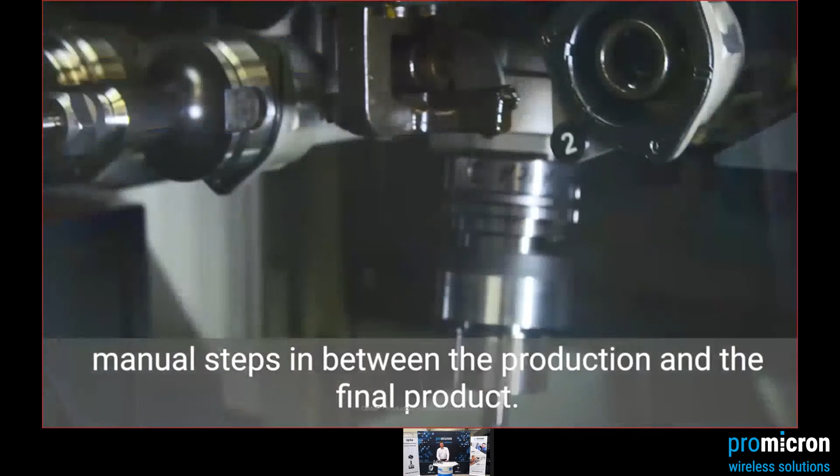I hope you got a little impression behind the scenes of pro-micron.

Before we start, I would like to use our agenda to briefly introduce you to what you can expect today. We will start with the cost drivers of the general value chain, then go to big data with pros and cons. Afterwards, we will go into the data concept of pro-micron with the Spike technology, decisions directly on the machine, the Spike map, an outlook to our AI, and after that we can do a Q&A.

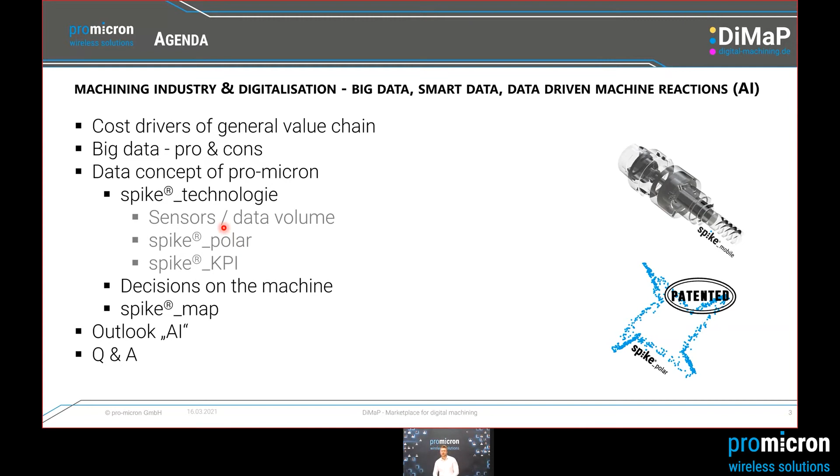So far, so good. Then let's start with the classic value chain in machining. As mentioned in the video by Mr. Lisicki, the Vice President at Grob, and as we can see on the slide, the downstream quality costs are a major cost factor in mechanical engineering—the cost after, or behind, the value adding processes, as could be seen here.

And the later an error is detected, the more expensive this error becomes. So the high quality costs are a big cost factor. However, this acknowledgement is not new, but that is the reason why our machines are getting smarter and why we add more and more sensors into our machines.

Today's machines consist of a large number of sensors, both as standard or as optionally selectable. Here it's often difficult to decide which sensors or options are the right ones. In any case, sensors are the basic building block for the path of digitalization and the big data approach.

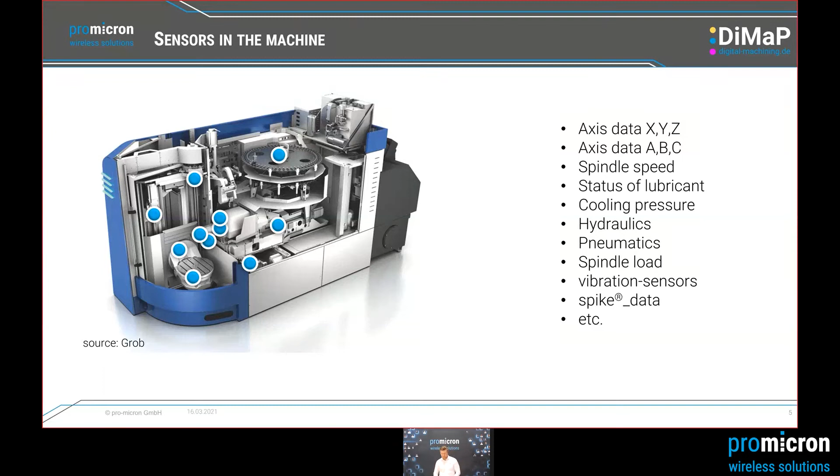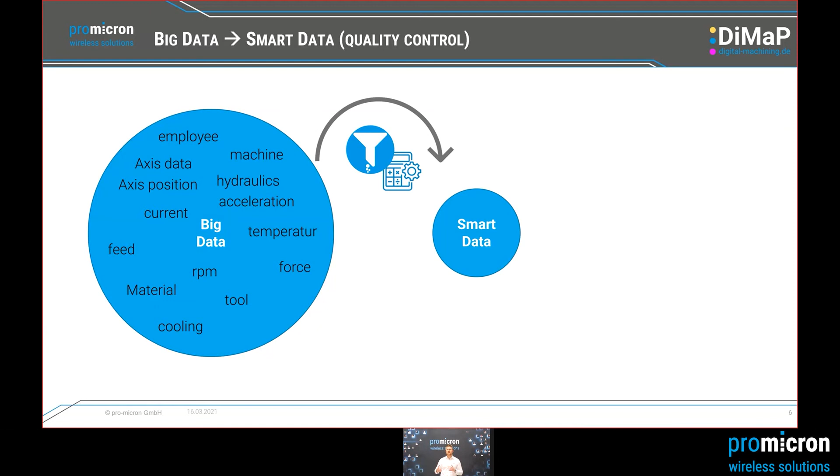But what do we do with this huge amount of data and this multitude of sensors? With intelligent algorithms, we filter the data according to our requirements. But often only a small fraction of the data is needed for one specific requirement, as an example, for the quality forecast of a part. So the situation is: a big data volume is needed, mainly for downstream analysis of data, and data specialists are needed.

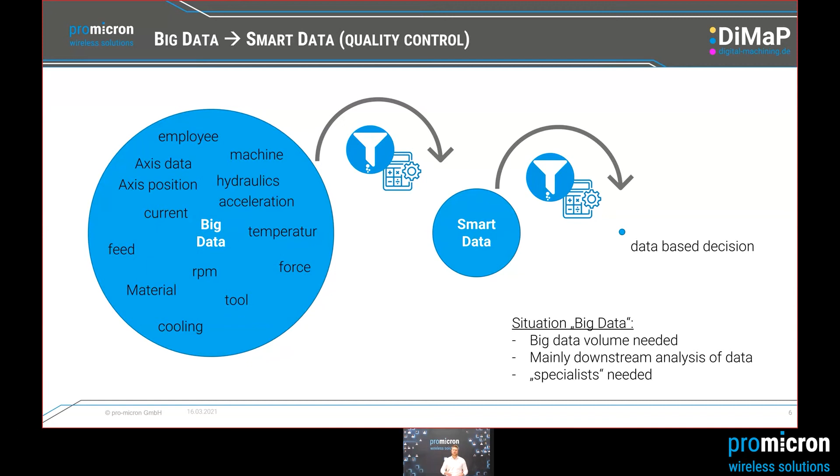But let's go back one more step and have a look at the big data concept in a fundamental way. On the left-hand side we can see the advantages of big data, and the advantages of big data definitely predominate.

Chances for better decisions, increase of productivity, to reduce cost, improve the service efforts, more flexibility, structured data storage.

But for the disadvantages, mostly and especially in Europe, the point of security brings a huge discussion with it. It is not the security itself, mainly it's an internal political decision in a company. Everybody and everyone wants to produce big data, but nobody is ready to share the data.

So the other disadvantages would be big data volume. We need experts, so data analyze experts, or we need a quality of data because it could fluctuate. But the fact is, we have to change our mindset in the machining industry.

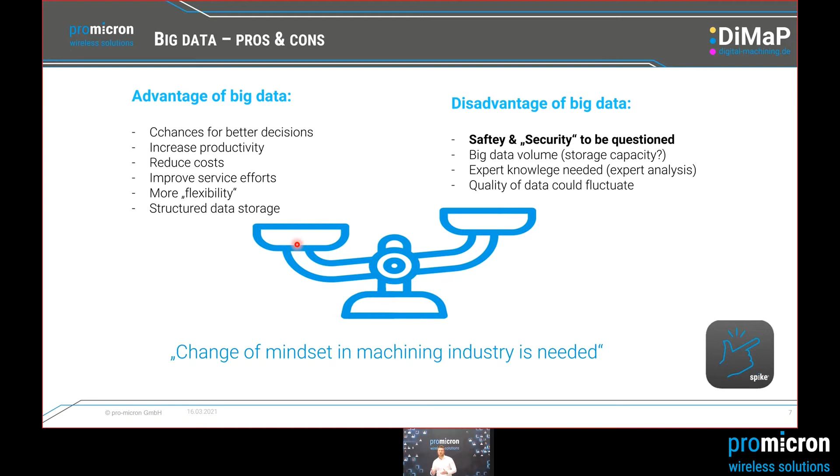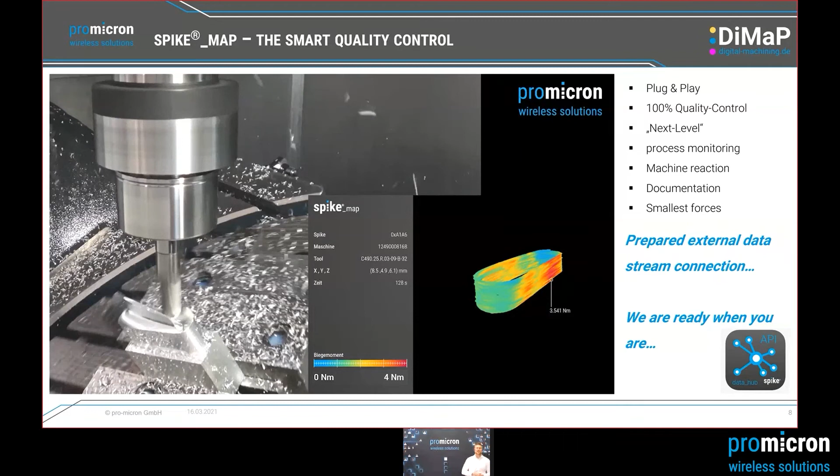So now I want to show you our idea of the smart data approach. It starts at the end, but I just want to give you a quick overview, and I just wanted to let the video speak for itself. Later on, we will go much more in detail into this solution. So it was just a quick jump into our product.

So in summary, what is the pro-micron spike map? It's a plug and play solution, so very easy to handle. Plug and play at the machine, very easy. A 100% quality control, next level process monitoring. We can do machine reaction. We have documentation, down to the smallest forces.

The external data stream is prepared to connect, and we are ready when you say yes, we get the security. But what makes our approach so different?

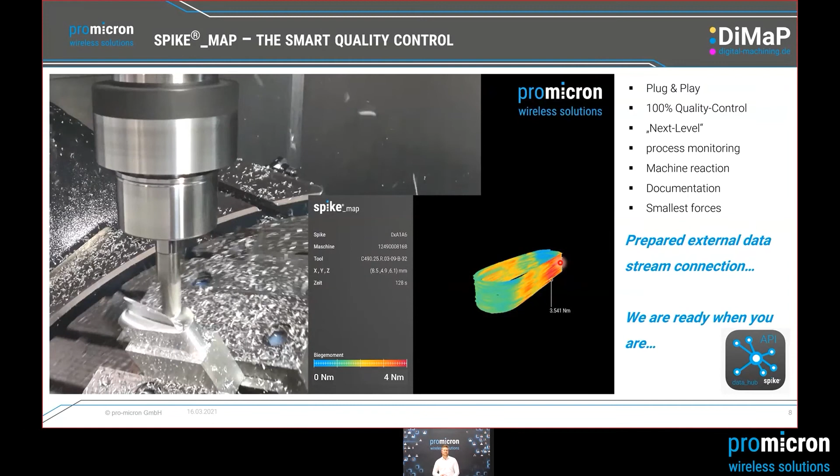We as pro-micron, or our pro-micron philosophy, means the further from the machine, the less quantity of data, but the more quality of data. So data pre-processing. We mainly focus on efficiency and response. With response, I mean response with the machine and machine response, and to create some actions. With our data hub, the big data approach is still possible, but just where it's needed.

So we got our spike sensors on one hand side, spike mobile and spike inspindle. We got the radio connection to send the raw data of bending moment, torsion, axial force. And here we get very nice and clever.

So that's the brain of our tool control center, filters and algorithm to calculate numbers which the machine could read. So we get here like a traffic light signal. We get red, yellow, and green signals, which are very easy to handle, and we get values.

So the pro-micron spike philosophy: raw data directly at the action point, real-time algorithm decisions and reactions directly on the machine, and no operational specialist is required.

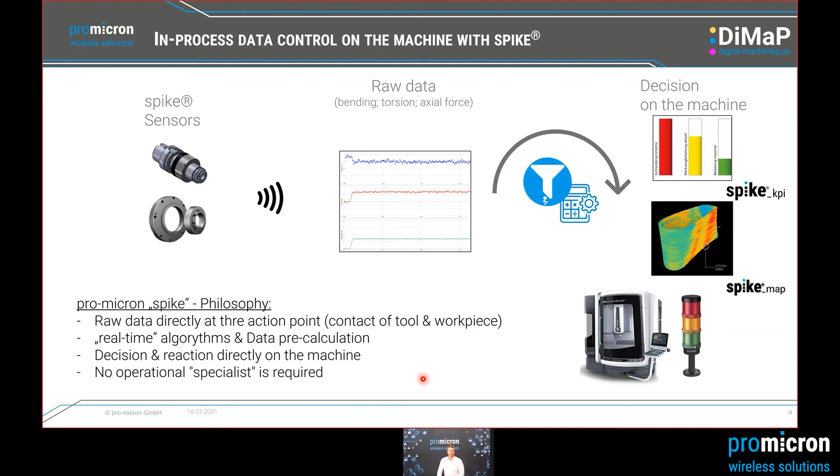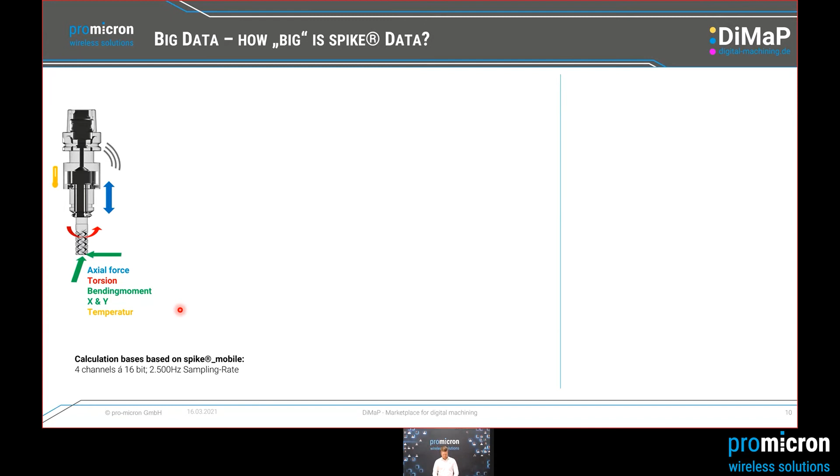But let's see how big spike data are. When we look at our spike mobile and look at axial force, torsion, and bending moment for the 4 channels with 2,500 hertz sampling rate, we get per minute 1.6 megabytes of data. Per day, 2.4 gigabytes. Per week, 16.8. And per year, we got about 900 gigabytes of data.

And now, imagine the impact for sensor systems with sample rates above 20,000 hertz. Or even better, imagine you got more than one machine in your machine hub.

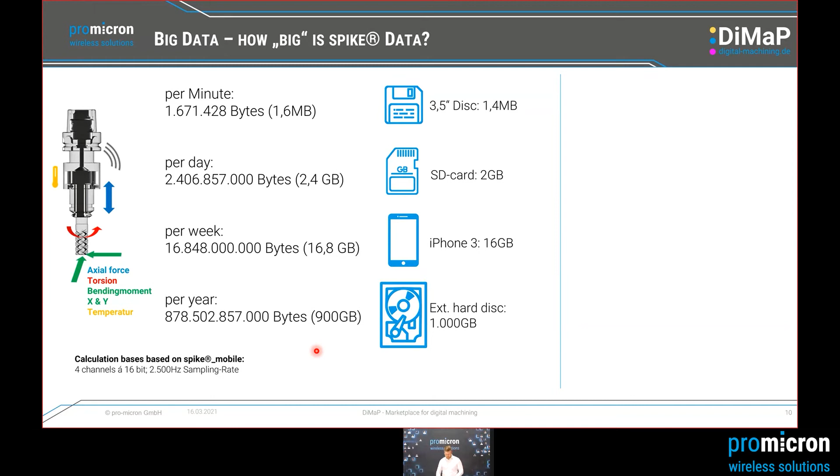So back to our spike system. By using an example from aerospace, one of the big blisks needs about 70 hours operation time. And in those 70 hours, we generate about 7 GB of data. This is about 10 CD-ROMs of 700 megabytes each.

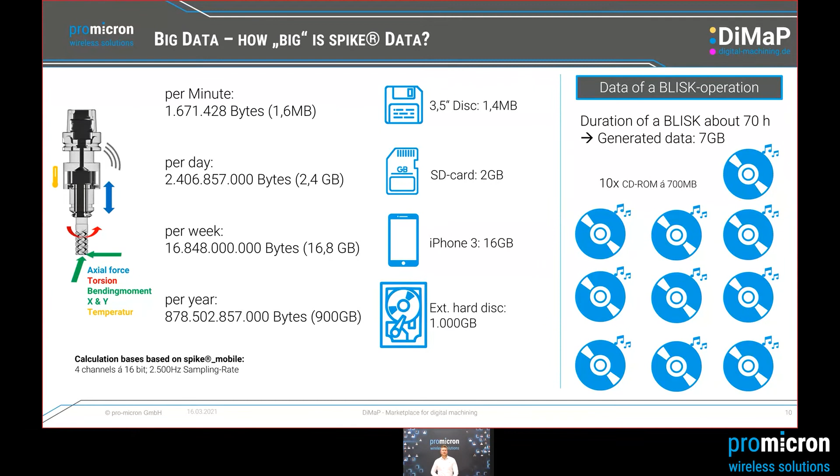Let's compare a few of the most common sensors in another way. Here we got our spike sensor technology at direct measurements. We got a spike mobile as retrofit on all the machines as possible. We get different sensitivity classes, so we can use it from huge tools to the smallest tools or finishing processes. We got our spike inspindle solution, which could be ordered at Grob or DMG, which is a very small sensor in the spindle nose, where you can see most of the data.

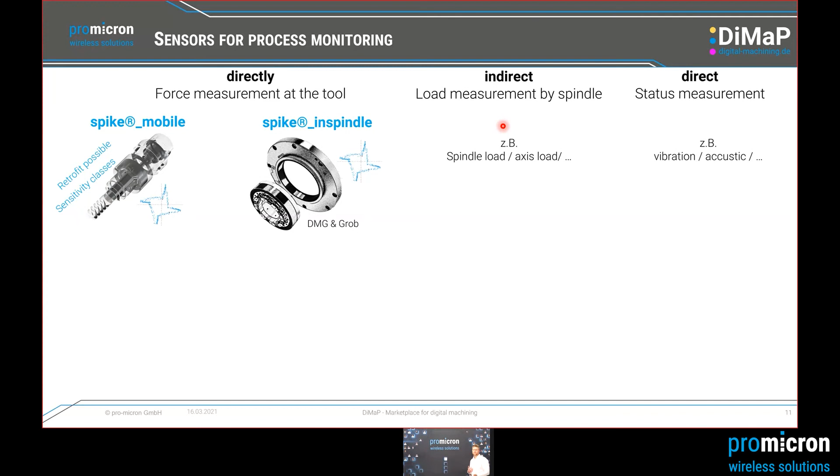As next, we have an indirect load measurement system by the spindle, for example spindle load, or we have a direct status measurement of vibration. The data which we can see are axial force, torsion, bending moment, temperature.

But yeah, we see different things. We see maybe vibrations, we see bending moment. But the use case in serial production, in monitoring, in quality, you don't want to know a bending moment. You want to know a value of chattering. You want to know a value of quality.

So what we want to show with this slide is the general networking of all data through pro-micron Tool Control. With the data hub, you can combine all these sensors. It doesn't matter which sensor you use or which sensor you need.

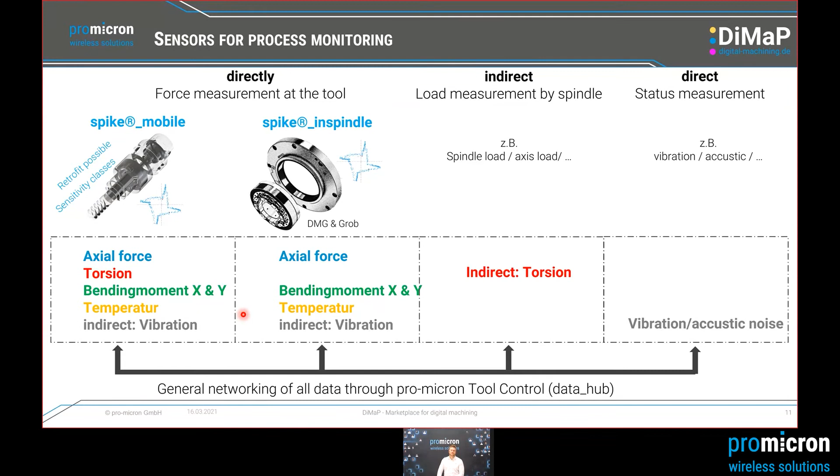The best and most sensible solution for you can just be determined in a joint conversation. Don't hesitate to contact us to discuss your individual use case with our application engineers. We'll be happy to advise you.

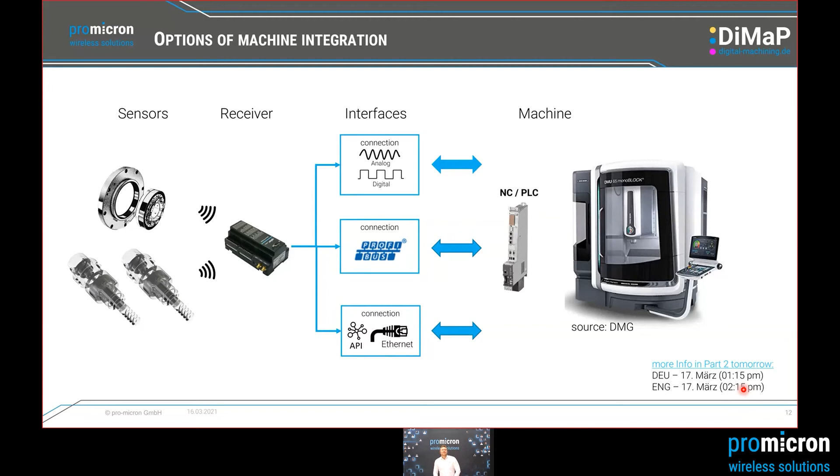So, enough of raw data and theoretical data concepts. What benefits can we achieve for the use case of inline quality control?

With our patented spike polar, we can see more than just a vibration or an increase of force. Here, for example, if one of the cutting flutes gets a small breakout or something like this, we can see each cutting flute, and so we can detect something like this.

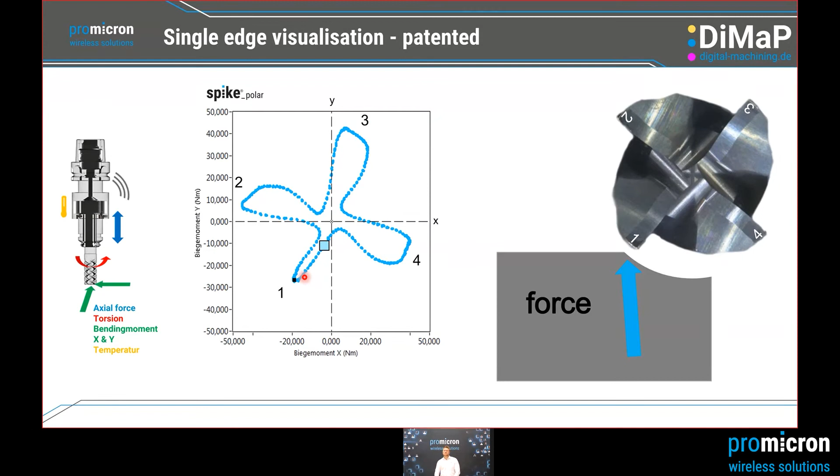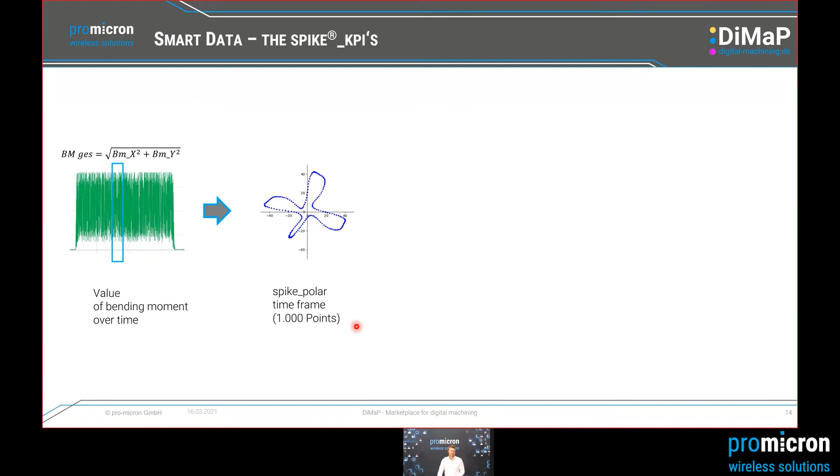But how does that work in machine connection? Our concept of smart data strategy: when we look at our raw data, we get a spike polar time frame of, for example, 1,000 points. So out of the raw data, we get 1,000 points. Now we have these 1,000 points, and we have intelligent filter options to reduce the spike polar as needed for this solution. So here, for example, we reduce the 1,000 points to 50 points.

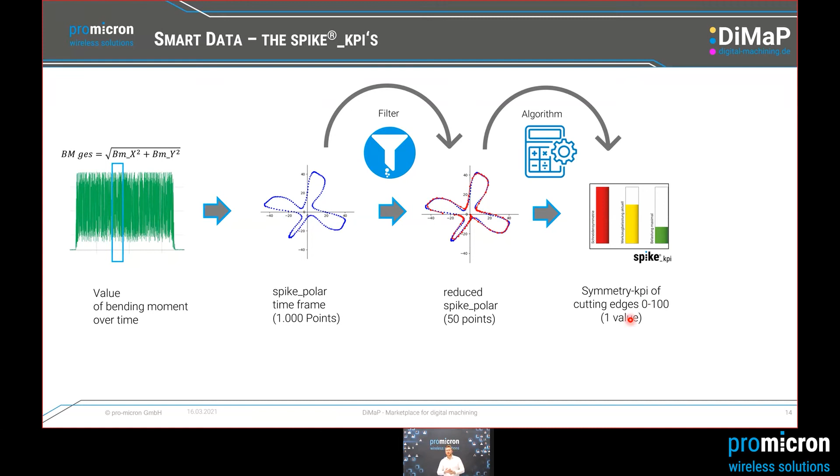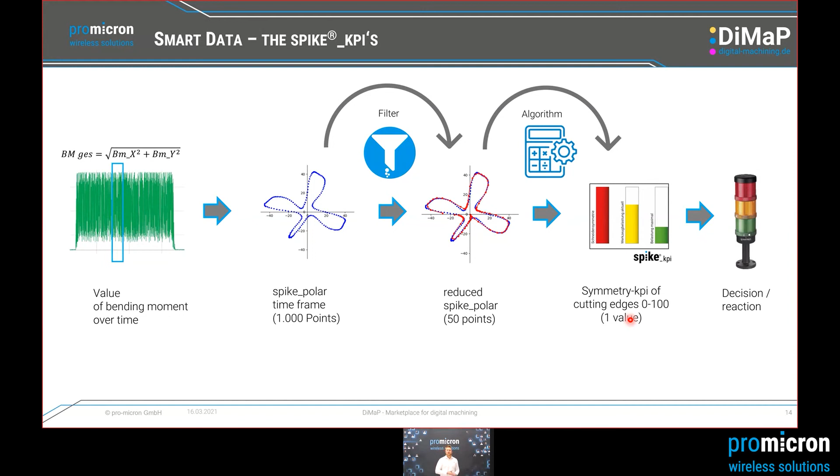After that, we have another intelligent algorithm which calculates a value between 0 and 100. So we get one value for one benefit. Do you think a machine can read this value much better than the raw data? Of course it can. And that's the reason, and that's the way how we do decisions and reactions directly at the machine. But let me show you this strategy with two concrete examples.

Example number one: the KPI for cutting edge breakage and concentricity, so run-out errors. We can see a new tool, a slightly worn one, or a highly worn one, cutting flute. So we prepared this cutting flute, and here you can see this one flute. At the beginning, everything is very symmetrical.

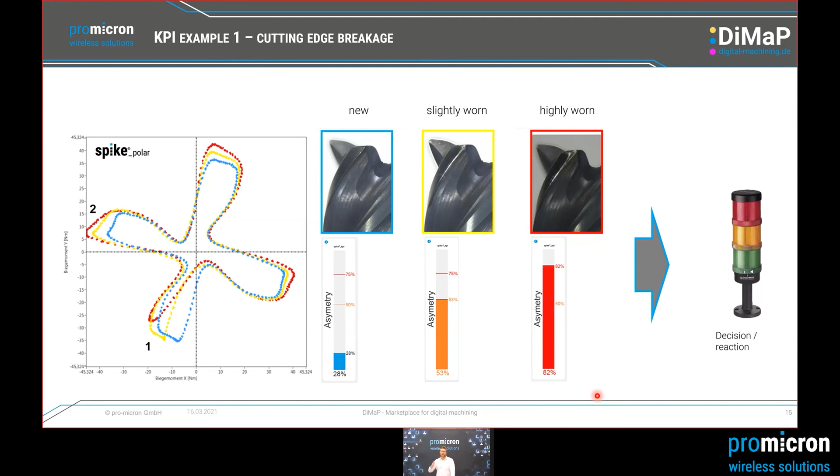So yeah, we get a very low level at the blue one. But after this slightly worn cutting flute, you can see there is a change in our spike polar, and that's what our value calculates out. And if you get a highly worn tool, you can see that the asymmetry is very, very bad. And so here you can make a decision: I have to change the tool, so you can do the reaction, change sister tool.

Another example is when we look at our raw data of bending moment. For the people who know our spike system, with the raw data you can see, for example, the amplitude - you can think about vibrations. So when there's no chattering, the amplitude is low, but when you get strong chattering, the amplitude is higher than with no chattering. But what do most machines do, or what does the spindle load monitoring do? They filter the data.

So now I want to show you our chatter KPI, and how it looks in different situations. When we have no chattering, here we can see the chatter KPI is 0 to 100 - here we get a level of 0. When we have strong chattering, here we have a level of 100.

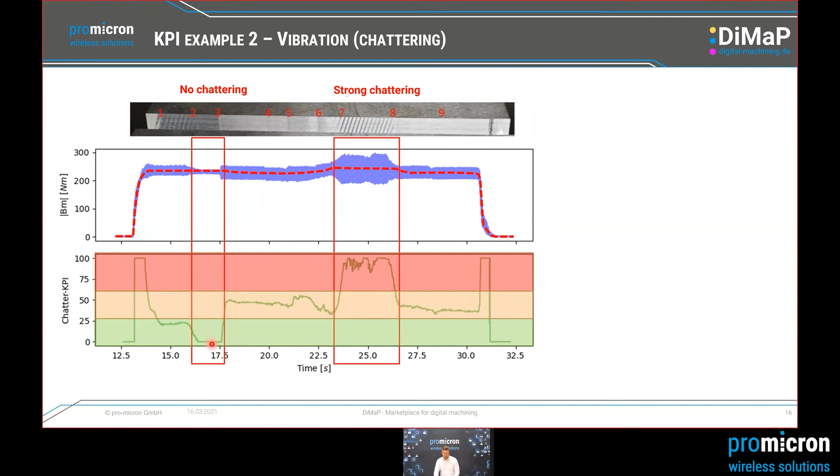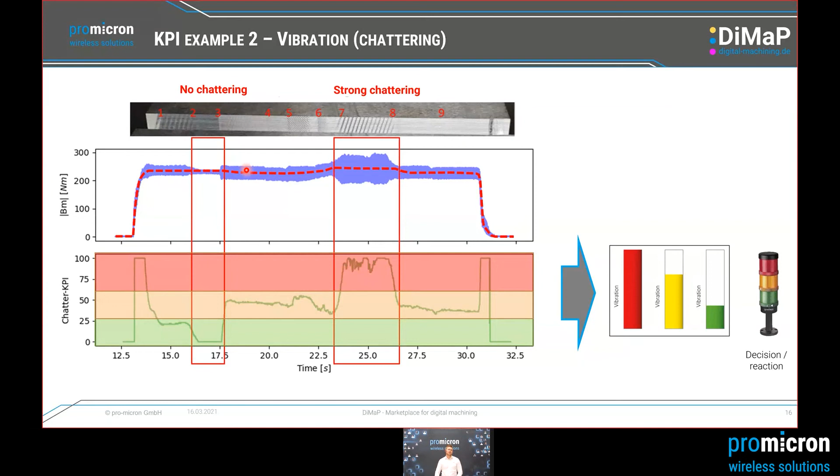And that's what I told you before - we can make a decision or a reaction. It doesn't matter how high the bending moment is in this situation. If you want to react to chattering, we can give you the chatter KPI and tell you, yes, it's chattering or not.

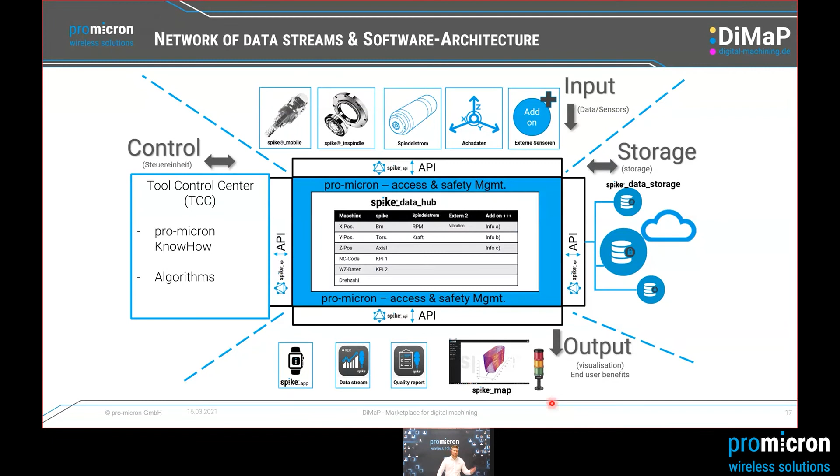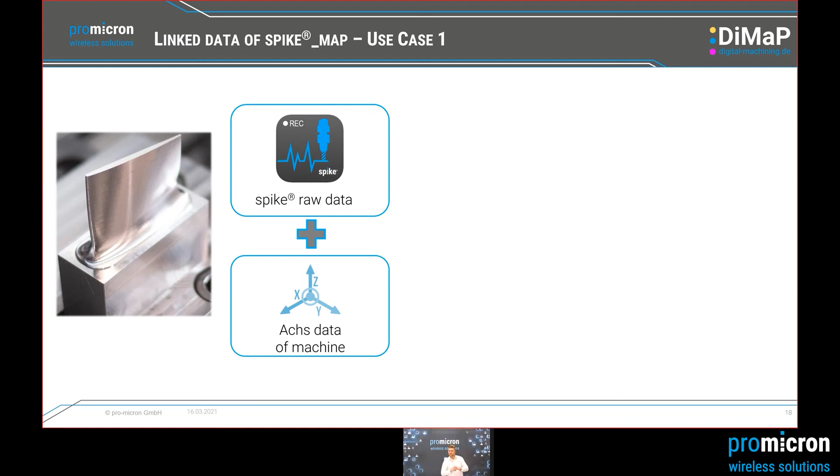So linked to the data of Spike, I want to present you use case number 1 for today. We are now slowly coming to the climax of our today's talk and our Spike map. The idea is to synchronize the measurement data with the axis position, to create a kind of digital twin. Our solution is called Spike Map.

In use case number 1, for the quality requirements of aerospace machines, we have the requirement of surface quality. Surface is very, very important. So we want to detect chatter marks or broken cutting edges.

Aerospace quality reports - each part should be reported. Each part, you should know how big or how good the quality is of your part. We need easy handling and visualization, and definitely you want reactions into the machine. And that's all together with a plug-and-play solution.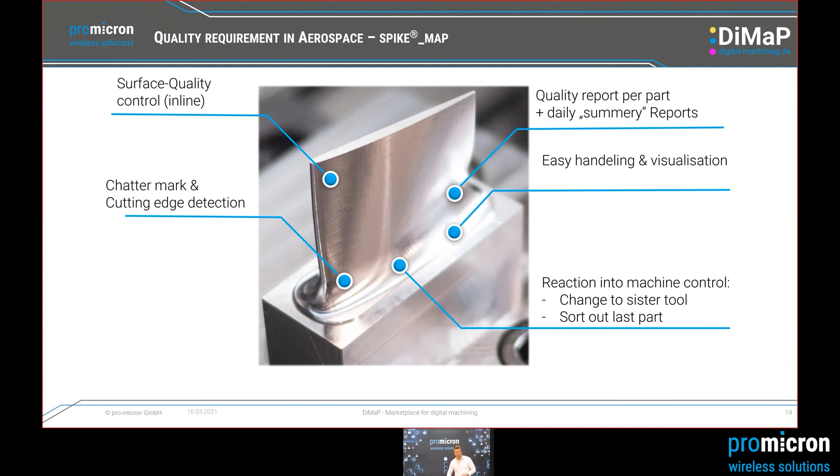We will go into the camera. Like you can see now, here next to me, our machine. Welcome to the Tech Center in Kaufbeuren. Today we show you a machining process of an example of a blisk, and we can switch the camera to the machining space.

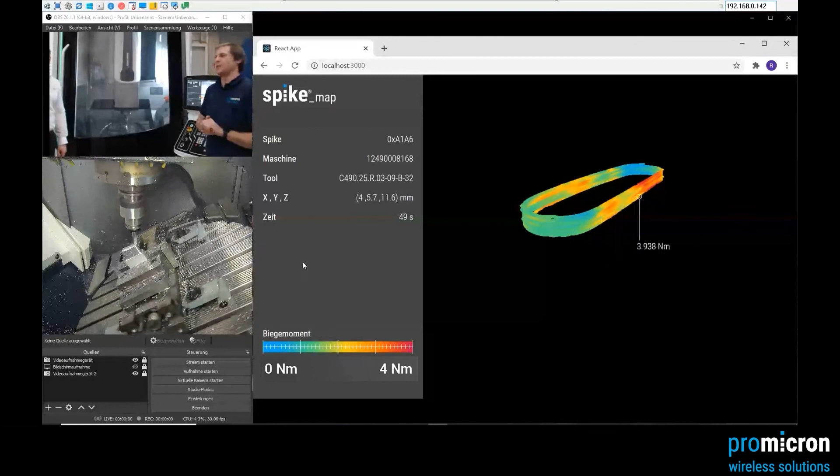On the left top window, you see me in front of the milling machine. On the left bottom, you see the machining space. And on the right side, you see the Spike map. At this machining process, we use a workpiece of aluminium with a spindle speed of 12,000 RPM and a feed rate of 1,000 millimeter per minute. So this is our example for this session today.

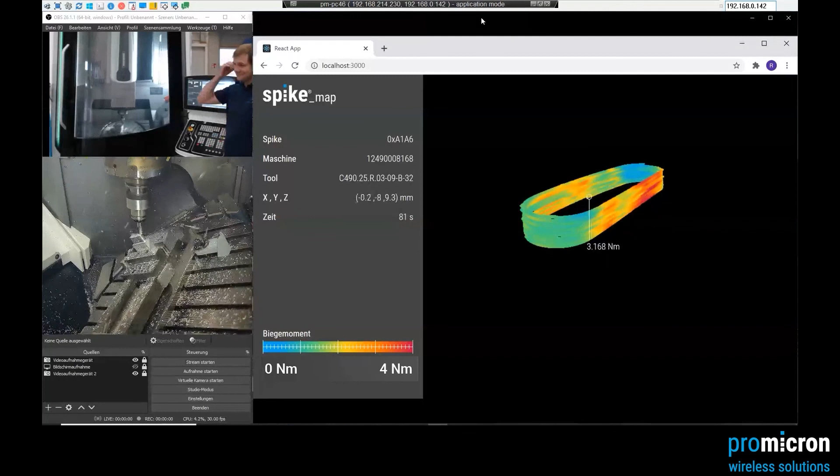Thank you, Dirk. I think it's very nice to have such a tech center here in Kaufbeuren. It's also nice for you if you have a machining operation where you say, okay, we've got a few problems with it - maybe you can talk with our application engineers. Like you can see, we have all the cameras looking into our machine, so maybe we can do one or another use case together with you from Kaufbeuren.

You can send us your workpiece and your tools maybe, and we can do the test here directly in the machine. Via the internet, we can show you Spike data, we can show you the Spike map, we can show you process optimization. All of this is possible here from our new tech center. And you can see behind Dirk, we also got now a new Grob machine. We are very happy also to have such a machine park here in Kaufbeuren.

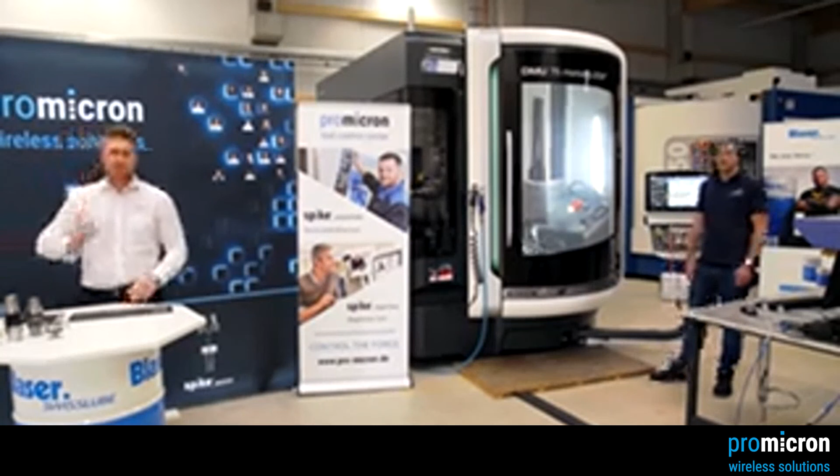So thank you, Dirk. We just wanted to show you the whole process of the part, and because of this the monitor switched off, but I will talk to you so far. After the monitor starts again, I will show you the whole machining operation of the product which you've seen on the machine in a video, because we did a summary of it. The machine runtime of this part would be about 25 minutes, so we compressed those 25 minutes into a video of about 3 minutes, so you can see all the data, the spike map, and the machine runtime.

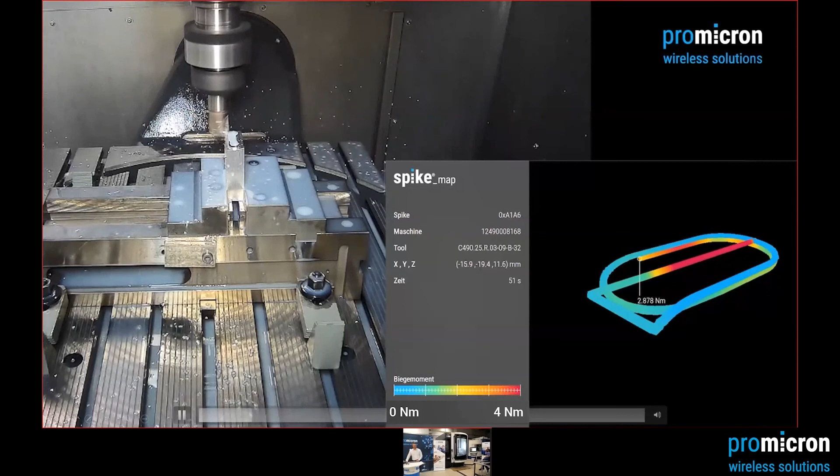Let's start with the roughing. Here's a diameter 25 head cutter. It's very easy to see that there's more material removed on the left side. I will put my pointer on again to show you - here we can see this red area. There's more material on the left side, like we can see right now, than on the other side.

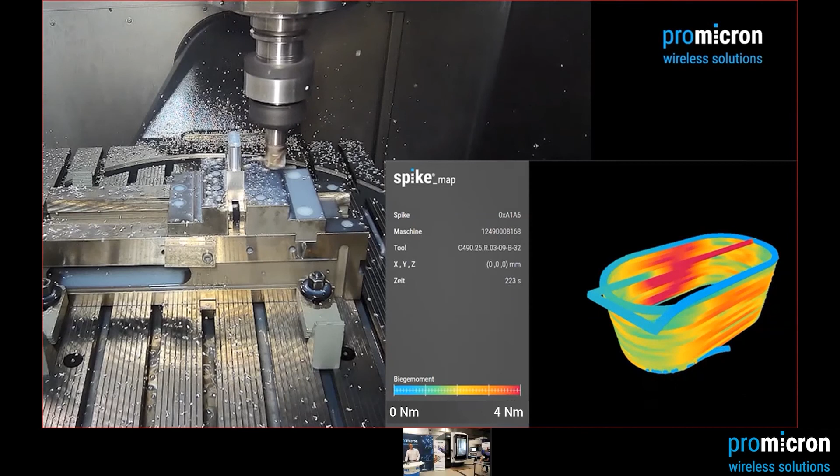Here we got the first part, so above the part, and in a few seconds we will change to the second process. The second process, like we've seen in our machine before, is with a 12 millimeter ball end mill, so it's the semi-finish process.

Here you can see that's exactly the same process we've seen before, but here I want you to see - exactly at this position, you can see very well how the wings and the geometry of the component create large amounts of force, especially on the side. That depends on the geometrical conditions of our part.

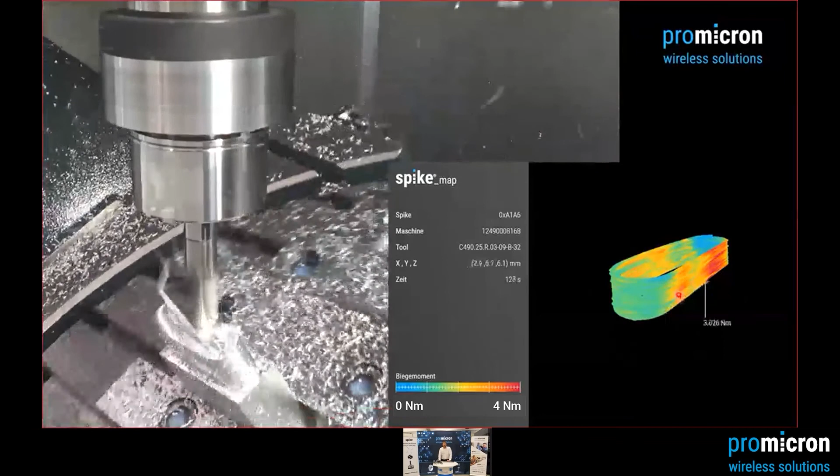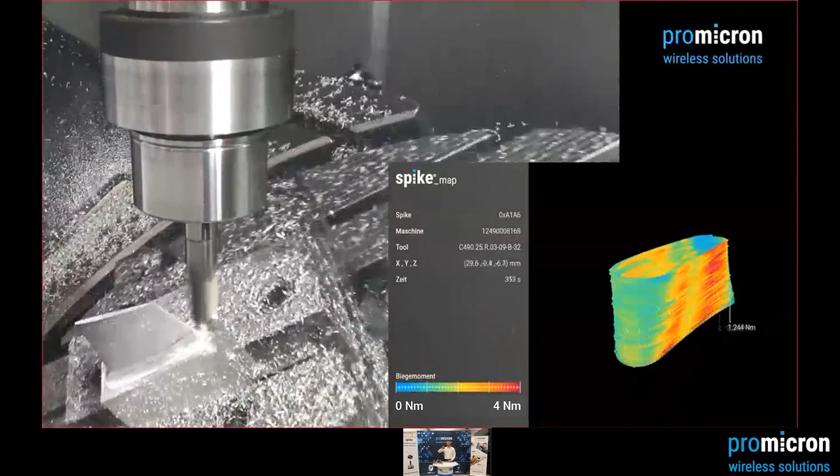So you can see very clearly here, we show the bending moment of the part. So far there's no KPI shown here, but we are actually developing this too, so you can change between the bending moment and all the different KPIs. Just after processing, you can calculate the KPIs located on the part.

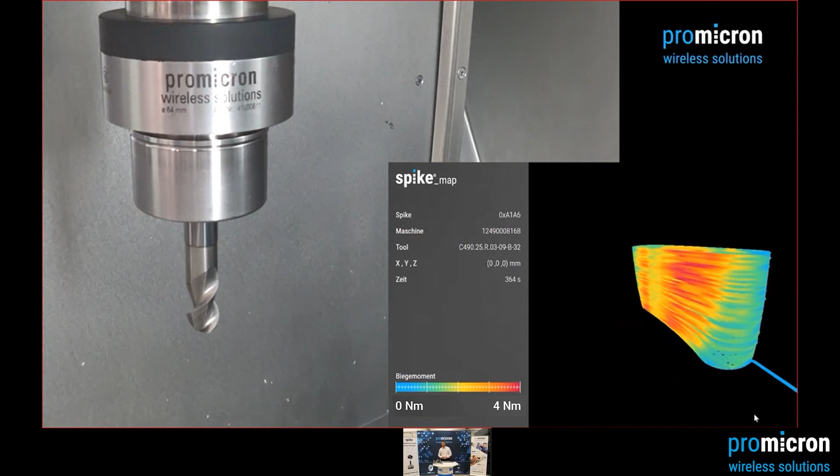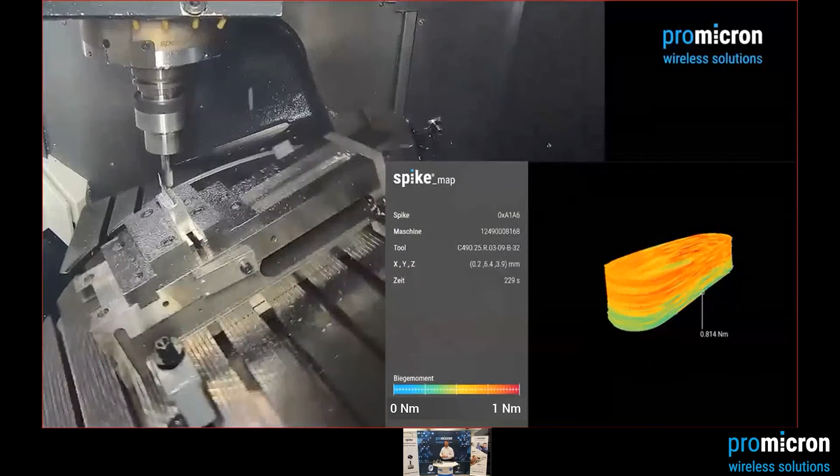So the next process is the third process, our finishing process with another 12 millimeter ball mill. And there I have to tell you, we are milling aluminium and we got an infeed of 0.1 millimeter. Such fine processing cannot be represented with spindle current alone. That is why we use our Spike Mobile with our sensitivity class A. So even for such small processes and such small infeeds, we got very, very good force measurement and visualization.

The goal behind the spike map is an after-process decision, yes or no, or through the process decision, part okay or not okay. So if there is an event, we want maybe a machine reaction. When the component is processed the first time, for example the prototype, the operator receives information about the NC block number, additional to the data, by clicking on the spike map. So if you can locate some problems, if you say, hey, I got some problems here in this area, you can click on them, and our spike map will show you the NC block number, so you know exactly where in your NC code you have to change something.

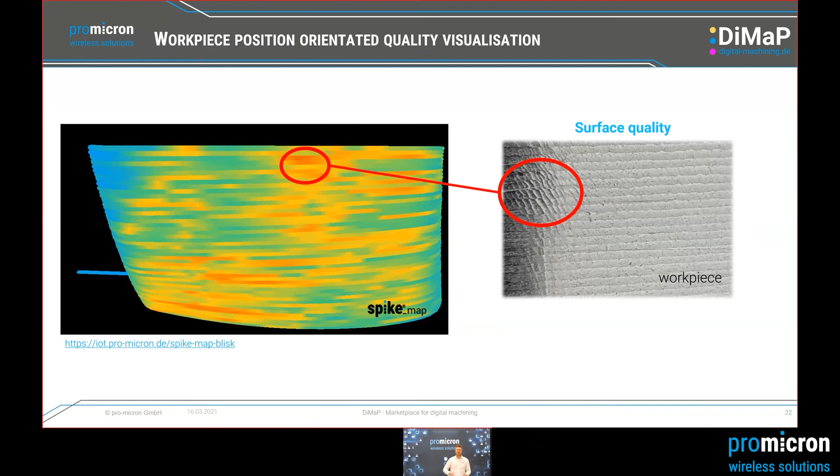Or further quality controls can take place in a targeted manner, only at necessary points, which entails great time and cost savings. So the benefits of the spike map in aerospace, mainly to be mentioned, is the documentation. We talked to a few of our aerospace manufacturers, and most of them told us that documentation and quality reports are very important for them. But there are also other benefits: in-process surface quality control, in-process monitoring for sporadic and systematic errors, machine reactions, position-orientated visualization, or connectability of our spike data into your data lake or something else.

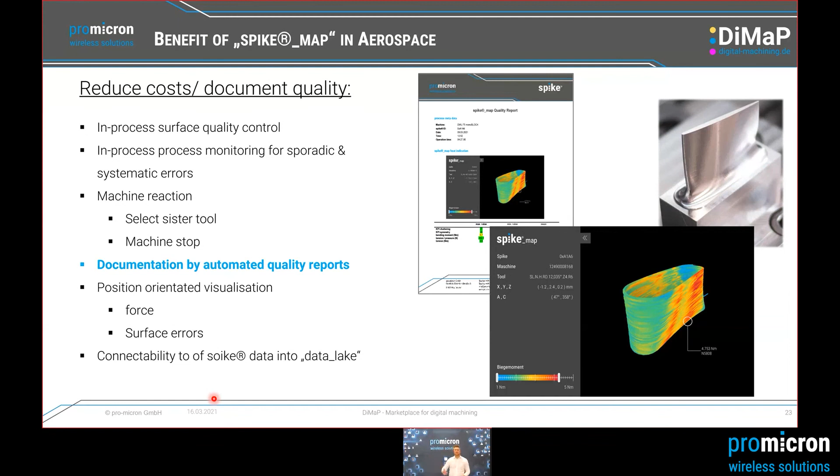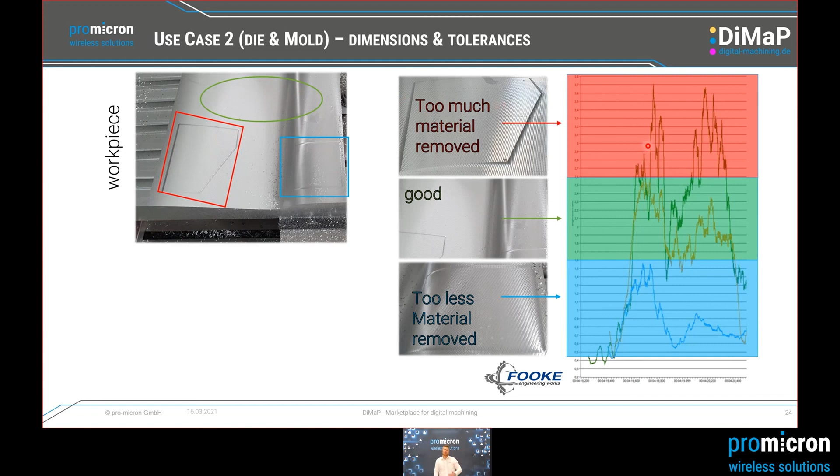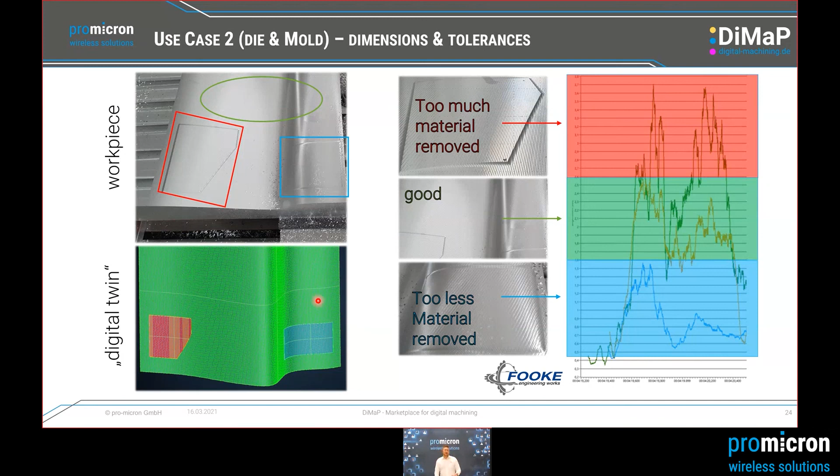So let's have a look at another use case: die and mold. When we look at the workpiece, here we get the same story. Too much material removed, the higher the forces are, and we get a red highlighted area in the digital twin of our spike map. If you get too little material removed, you get a blue or green area.

So to reduce cost or improve quality, the benefits of the spike map at die and mold are again the same, but as Fooke told us, the machine reaction is the most important thing. So select sister tool, machine stop, or again documentation.

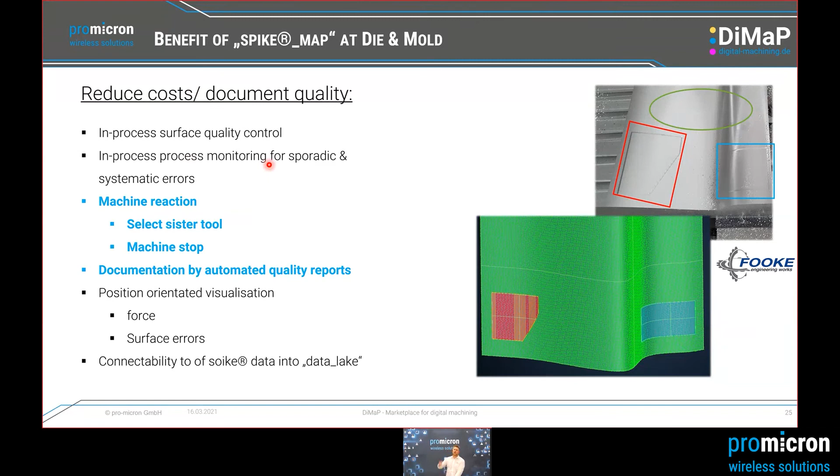For example, Bosch: now more than 50 machines worldwide in 24/7 production monitor a deburring process with our Spike Mobile, day by day. Or for example, Ceratizit: tomorrow there will also be a webinar of Ceratizit, you should jump into tomorrow. They will present an automatic tool radius correction inline in the machine, in the process, in the production of an M2 thread, so with thread milling.

And also, for example, Stryker should be mentioned, with whom we conducted a short interview.

Mr. Markus Böcher, manager pilot line advanced operations, was asked: Where do you think the trend or tasks in machining will go, and can Spike help you? He answered: For me, it's all about lean production, that means reducing any kind of waste. It doesn't matter if it's production time, reject cost, not adding value work, or downtime. If such new technologies help us, this is exactly what we are looking for.

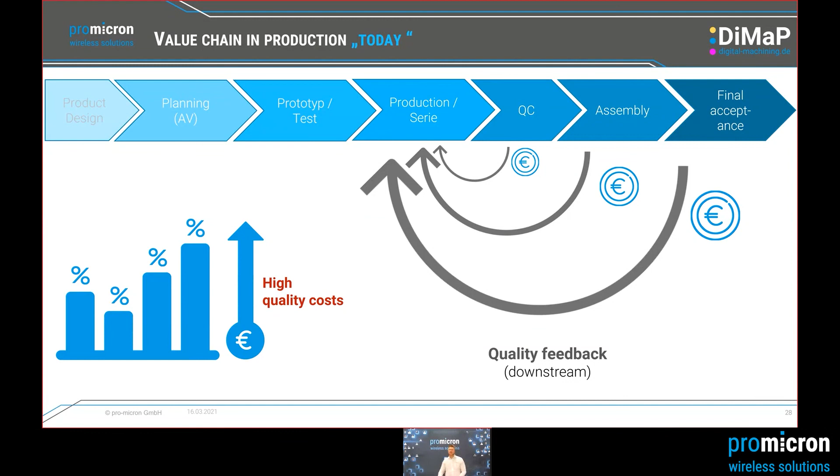Like I mentioned at the beginning, downstream quality costs are a major cost factor in mechanical engineering. The later an error is detected, the more expensive this error becomes. Now let's look at how this situation changes by using our TCC, our Tool Control Center. The inline quality costs can significantly reduce the downstream costs through our inline process quality control, so the quality cost can be drastically reduced.

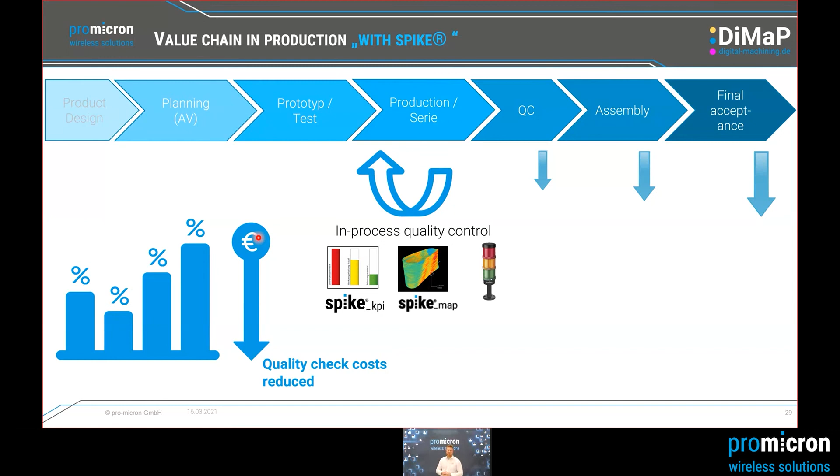And now let's take a short look into the future together by looking at one of our machine learning approaches. So, an outlook on AI: just to mention, we got different labels for a drilling process. For example, we say, okay, there is no error, it's a good process, quality is good, tool load is good, we get a stable process. But we also have signal patterns trained and labeled for tool wear, for tapping error, for drill course issues, for chip clamped, or for some other errors.

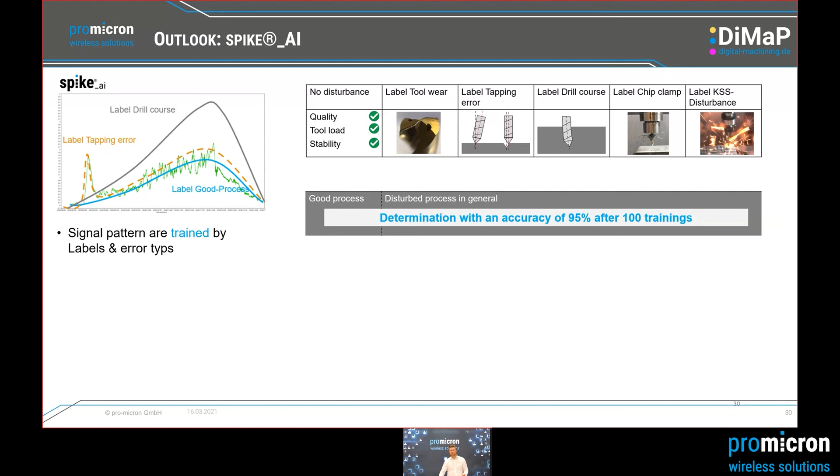And we trained the labels 100 times. After 100 trainings, we did 50 good trainings, and for each label we did one bad training. After 100 processes, the idea was we had an accuracy of 95% after 100 trainings, determining whether it was a good process or a bad process.

After 100 trainings, the differentiation was still at 69% of which the special errors it was. So with an increase of the amount of learned data, we will increase the prediction accuracy. The next step afterwards will be the transferability to other or similar processes, or for example to different tool diameters.

Markus, I have a question. Can you give us again a rough idea of how big the forces were in the finishing operation with the blisk you machined? Which force level is Spike measuring? The biggest force in this aluminium measurement was about 1.2 Newton meters, and let's talk, it's a bending moment, so it's not the torsion moment like a spindle engine for example. Because it's aluminium we got very small forces for that, so 1.2 Newton meter bending moment. When we calculate with a leverage of 150 millimeters, for example, you can also calculate out the force: bending moment divided by lever arm.

Okay, thank you, interesting, pretty small I would say. Of course it's very small, that's the idea behind Spike. We don't want to have a Spike mobile like you can see here for every process, just use a Spike mobile as a sensitive tool where you need it. If the spindle load is okay, or if other sensors give you the information, there's no problem for us. We've got the tool control center, so we can also put the data of another sensor in our tool control center and do exactly the Spike map with other sensor data or other information.